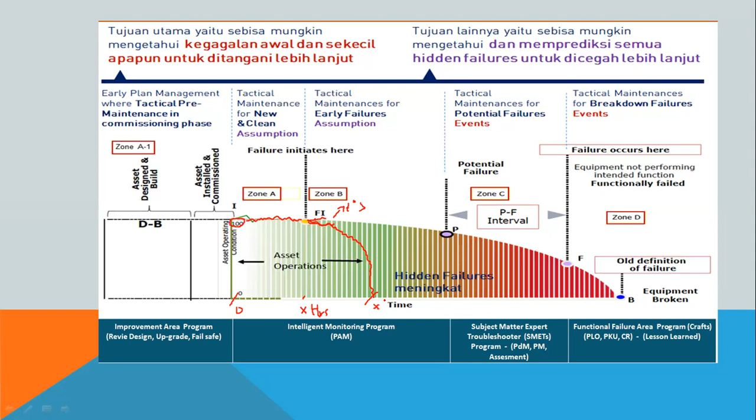If we don't do any maintenance, the engine temperature will rise and the engine will break down in a shorter time. And absolutely we don't want that to happen in our engine.

So if we do predictive maintenance, we can see the condition of our engine, maybe using temperature. We can see the oil condition, check the oil physics. We can see the engine parameters: voltage, frequency, current, power sent to the load. We can analyze whether the engine is healthy, has a problem, or has degradation.

And sometimes, over some years, we cannot afford maintenance that brings it to 100% again, because major parts may already be degraded: insulation degradation, or mechanical part material fatigue because they touch each other for several years. So at this point, we can choose: we can analyze using the cost. Maybe we repair, replace with a new one, or do nothing.

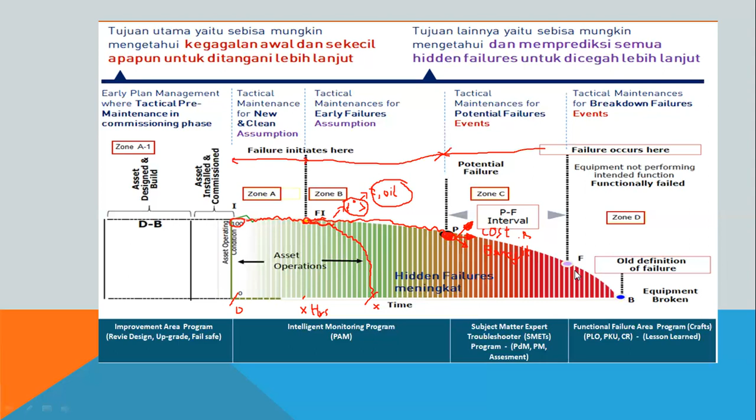Okay, some equipment will age and then break down. So we want to discuss reliability versus aging. These indicators are very related; there is a similarity. Reliability is defined as the probability that an item will perform a required function without failure under stated conditions for a specified period of time.

So there are four parts to the definition of reliability: probability, performing a required function without failure, under stated conditions, for a specified period of time. First, probability: for example, a timing chain might have a reliability goal of 0.9995. This would mean that at least 99.95% are functioning at the end of the stated time.

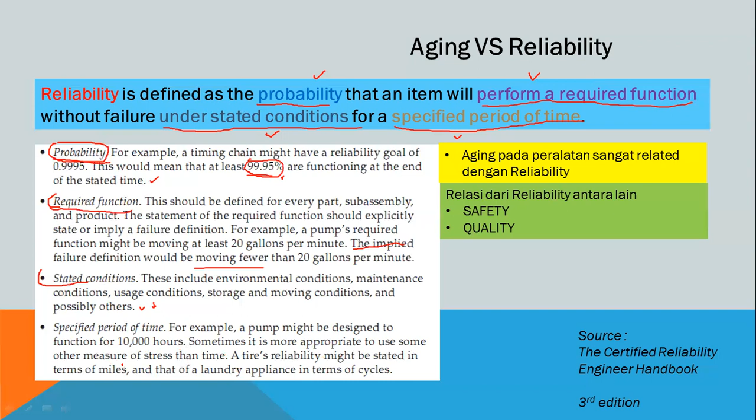And then the fourth component of the reliability is specified period of time. For example, a pump may be designed to function for 10,000 hours. Sometimes it's more appropriate to use some other measure of stress than time. Yes, hour is the simplest for analysis of the lifetime of our equipment. Maybe the second parameter to analyze the lifetime is kilometer, or for power plant electricity it is megawatt hours, MWh.

For example, the pump might be designed to function for 10,000 hours. Sometimes it's more appropriate to use some other measure of stress than time. A tire's reliability might be stated in terms of miles, and that of a laundry appliance in terms of cycles. Okay, and then reliability, once again, is defined as the probability that an item will perform a required function without failure under stated conditions for a specified period of time.

And then aging is very related with reliability. The other relation of reliability is safety and quality. When the equipment is running with reliable condition, it already has a safe condition. For example, we have a car with healthy condition and reliability 100%. It is 100% certain that this car is safe to operate. Also, with quality components, the output of the engine will be high quality.

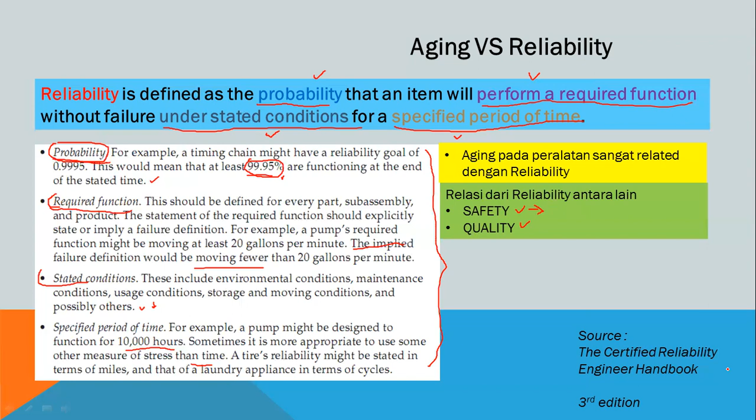Okay, the source of the content is taken from the Certified Reliability Engineer Handbook. And then what reliability tools can measure or analyze how to maximize reliability? One of the most common that engineers use is FMEA. What is FMEA? It is failure mode and effects analysis.

FMEA is an engineering technique used to drive product and process reliability improvement. It is a structured analysis of a system or subsystem to identify potential failures, the causes of these failures, and the effect these failures will have on the operation of the product or process. So FMEA is to analyze the reliability of a process or improve reliability.

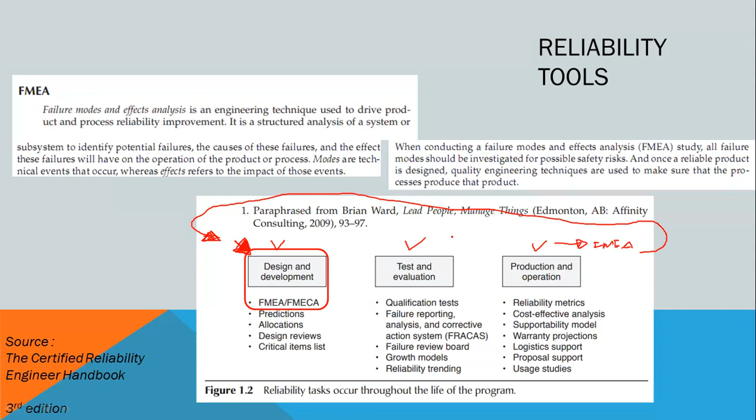And then at production, under operation, and after the end of lifetime, we do FMEA, because at the end of life, maybe we can make a better design next time for a better product. So this is using FMEA at every step of the product lifetime. Every time we can use FMEA tools to achieve the highest reliability.

So what is FMEA? How can we analyze, technically and simply, to do FMEA? Okay, next time we will discuss FMEA more deeply.

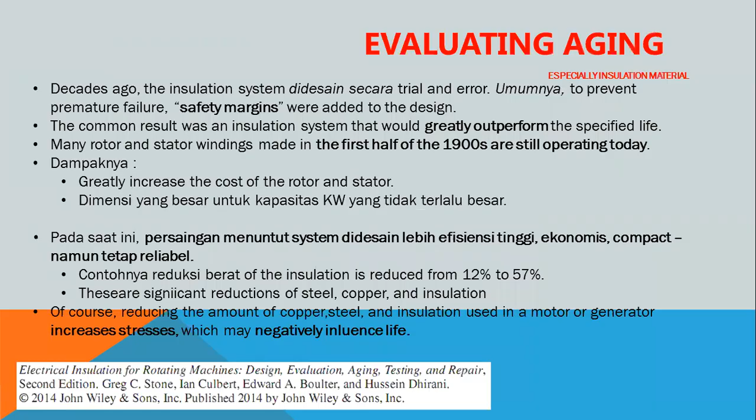We will discuss FMEA more deeply, and then we can use some examples, and about aging and others next time. Thank you. Goodbye.